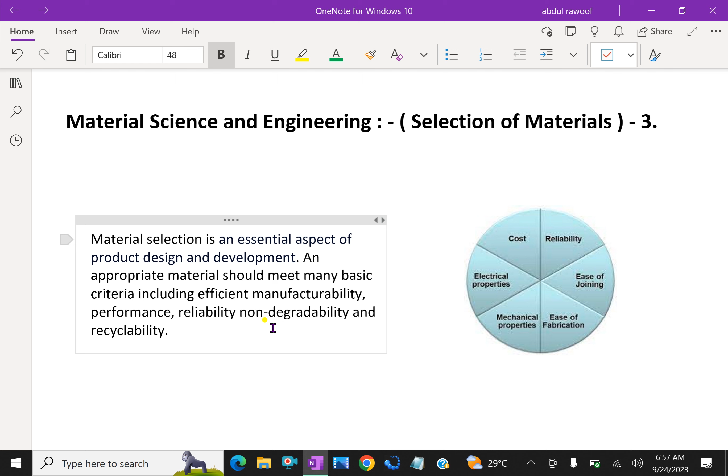In recent years, polymeric materials or plastic have gained considerable popularity as engineering materials. Though inferior to most metallic materials in strength and temperature resistance, these are being used not only in corrosive environment but also in places where minimum wear is required. For example, small gear wheels originally produced from hardened steels, but nowadays nylon gears are also in use.

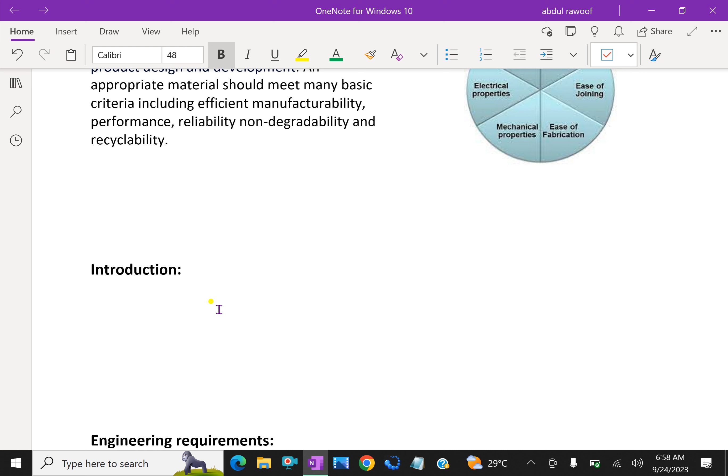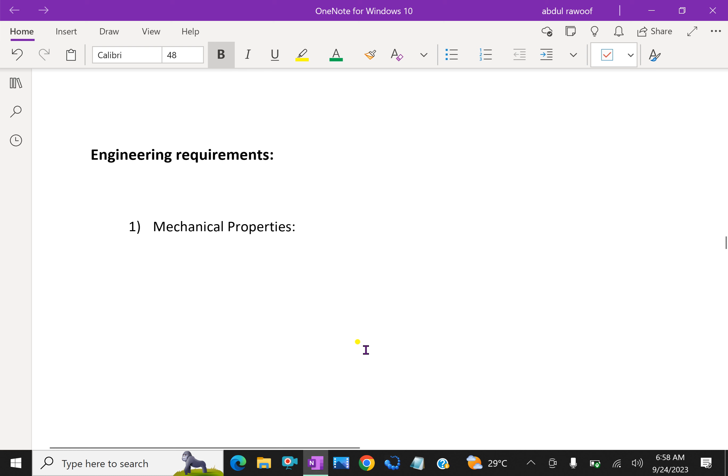Now we'll consider the next engineering requirements: first, mechanical properties. The important mechanical properties affecting the selection of materials are tensile strength. This enables the materials to resist the application of tensile force. To withstand the tensile force, the internal structure of the material provides the internal resistance.

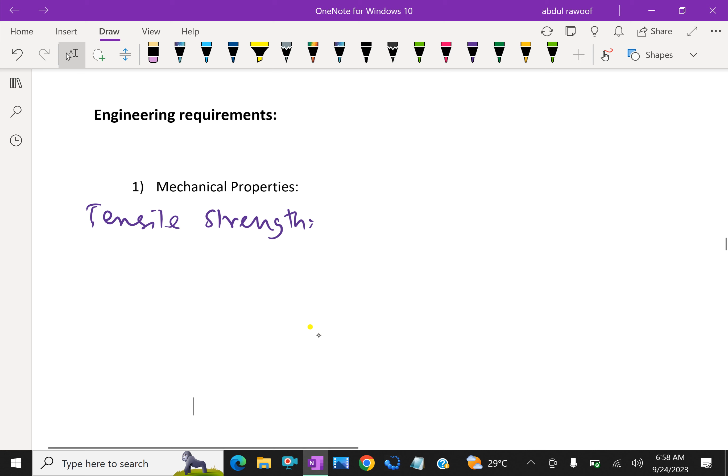Hardness is the degree of resistance to indentation or scratching, that means abrasion and wear. Alloying techniques and heat treatment help to achieve the same. That means the hardness is improved by alloying as well as heat treatment of the metal.

Ductility. This is a property of a metal by virtue of which it can be drawn into wires or elongated before rupture takes place. It depends upon the grain size of the metal crystals.

Next, impact strength. Impact strength is the energy required per unit cross-sectional area to fracture a specimen. That means how much load you have to apply by impact force to fracture the specimen. It is a measure of the response of material to shock loading.

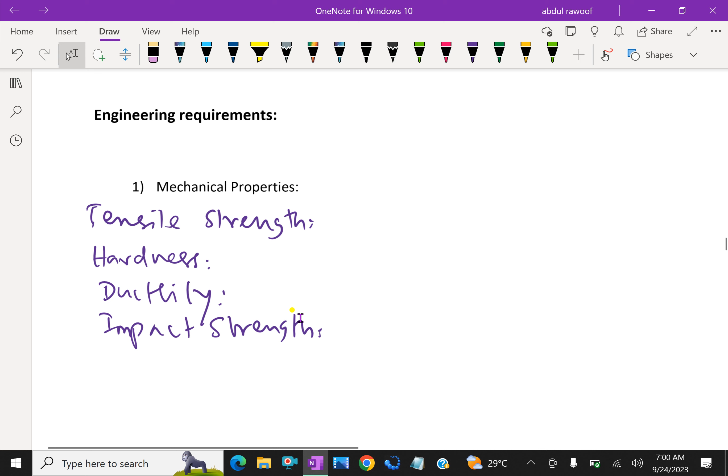Wear resistance is the ability of a material to resist friction wear under particular conditions, that is to maintain its physical dimensions when sliding or in rolling contact with a second member. That means wear resistance is about contact and rubbing with other materials, and how the material resists wear.

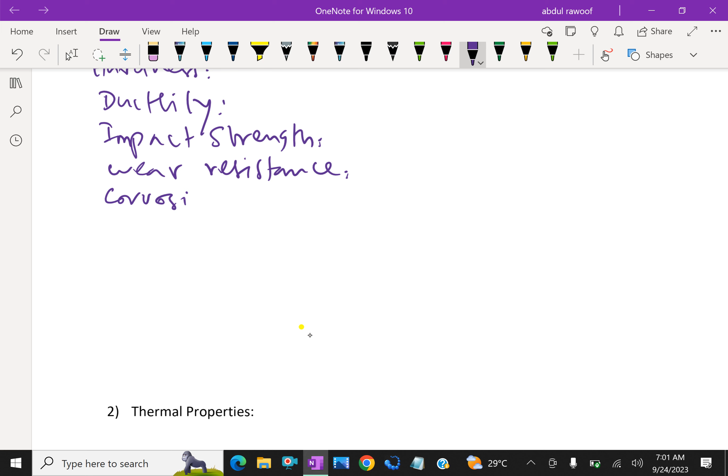Corrosion resistance: those materials and alloys which can withstand the corrosive action of a medium, that is, corrosion process occurs in them at a relatively low rate, are termed corrosion resistant. Mainly corrosion resistance is considered when the environment demands that usage. Next, density.

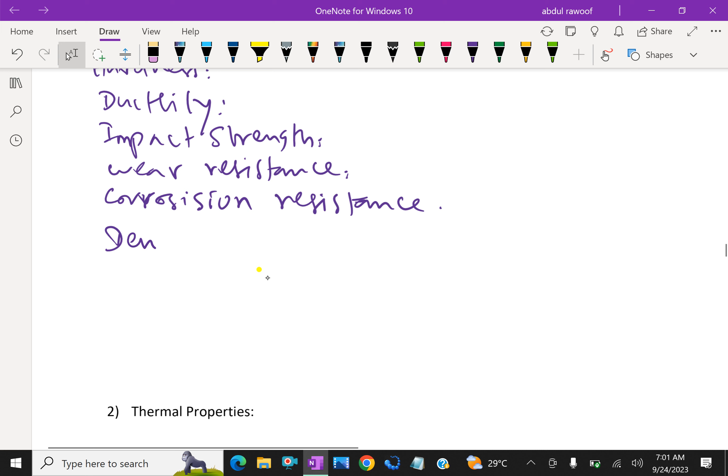Density is an important factor where weight and thus the mass is critical, that is in aircraft components. There, we mainly consider the density of the material. That means less weight, more effect; less weight, more strength.

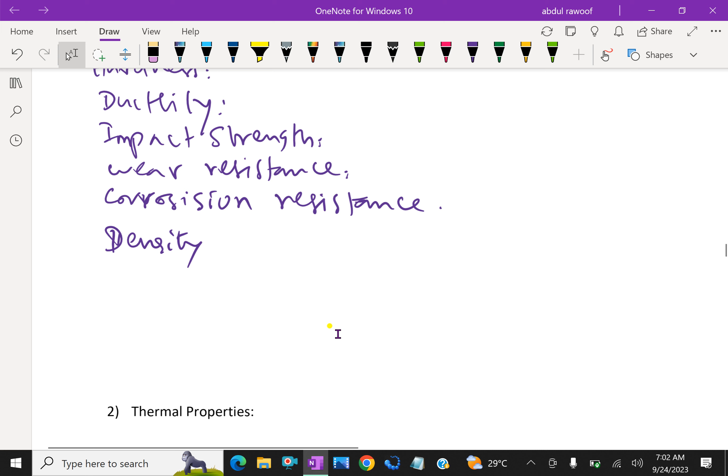Next, we consider thermal properties. The characteristics of a material which are functions of temperature are termed its thermal properties. One can predict the performance of machine components during normal operation if he has knowledge of thermal properties: specific heat, latent heat, thermal conductivity, thermal expansion, thermal stress, thermal fatigue, etc. are a few important thermal properties of materials. These properties play a vital role in selection of materials for engineering applications, that is, when the materials are considered for high temperature service.

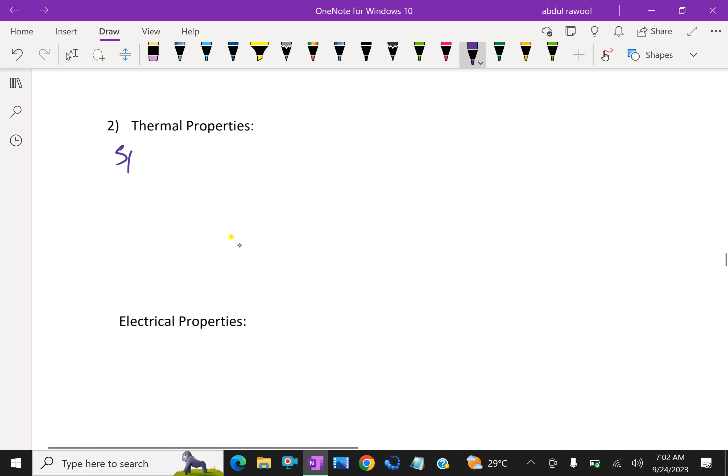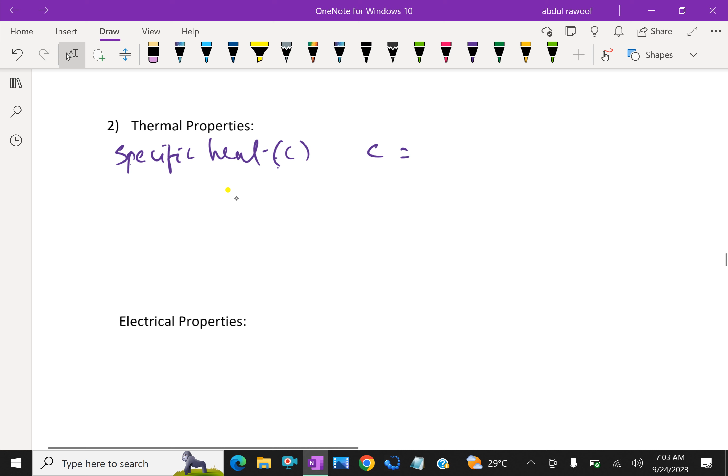Thermal conductivity, K, is defined as the amount of heat conducted per unit time through unit area perpendicular to the direction of heat conduction, when the temperature gradient across the heat conducting element is 1 unit. That means K equals Qx over A(theta2 minus theta1), which is in units of watts per meter per Kelvin.

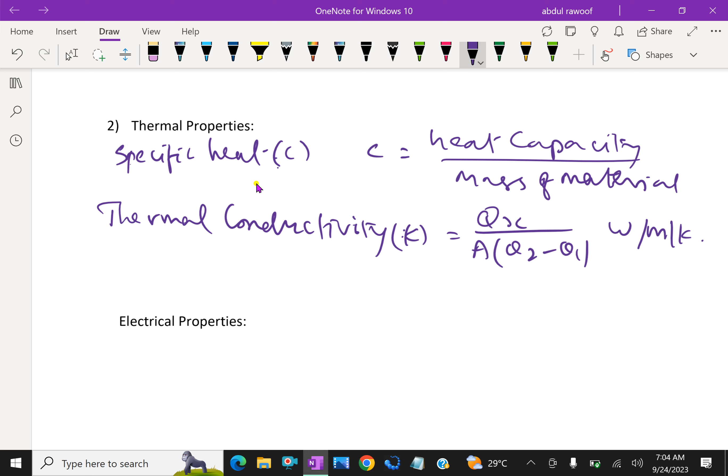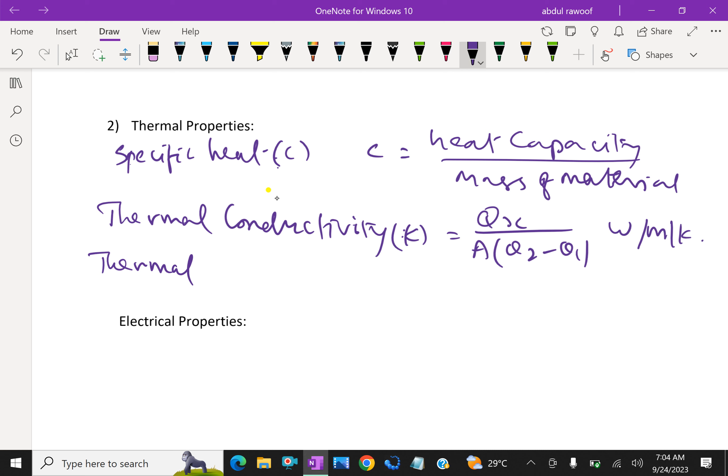Next, thermal expansion. All solids expand on heating and contract on cooling. Thermal expansions may take place either as linear, superficial, or cubical. A solid which expands equally in three mutually orthogonal directions is termed thermally isotropic.

The increase in any linear dimension of a solid, that is length, width, or height, on heating is termed linear expansion. The coefficient of linear expansion is the increase of length per unit length per degree rise in temperature. The increase in volume of a solid on heating is called cubical expansion.

The thermal expansion of solids has its origin in lattice vibration, and lattice vibration increases with the rise in temperature. Therefore, thermal expansion: L alpha T, where L is the original length of the body, alpha is the coefficient of thermal expansion, and T is the temperature change.

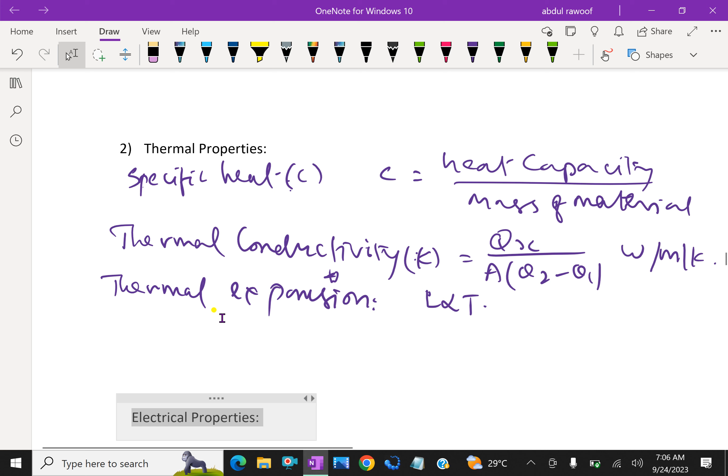Next, thermal diffusivity. It is given by thermal conductivity divided by heat capacity into density. Thermal diffusivity equals thermal conductivity K over heat capacity Cp into density rho.

The material having a high heat requirement per unit volume possesses a low thermal diffusivity, because more heat must be added to or removed from the material for affecting the temperature change.

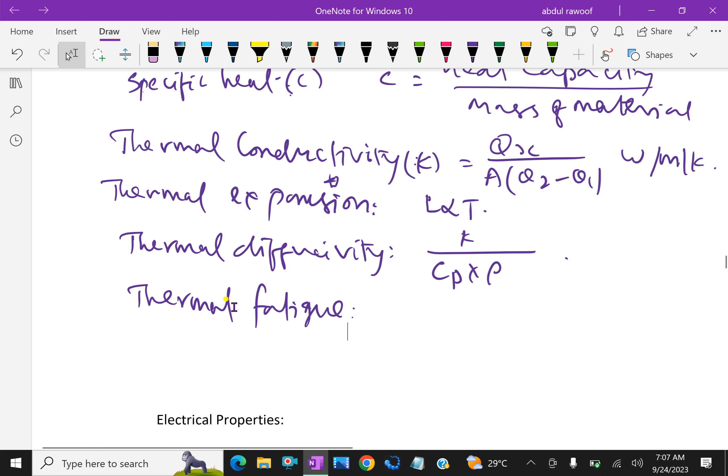Next, thermal fatigue. What is thermal fatigue? Thermal fatigue is the mechanical effect of repeated thermal stresses caused by repeated heating or cooling. The thermal stress can be very large, involving considerable plastic flow. Fatigue failure can occur after relatively few cycles. The effect of the high part of the temperature cycle on the strength of the material plays an important factor in reducing its life under thermal fatigue.

Now next we'll discuss electrical properties. Conductivity, resistivity, and dielectric strength are few important electrical properties of material. A material which offers little resistance to the passage of an electric current is said to be a good conductor of electricity.

Now we can write resistance equals resistivity into length over cross-sectional area. That is, resistance equals resistivity into length over cross area.

Usually, the resistivity of a material is quoted; the unit of resistivity is ohm meter.

On the basis of electrical resistivity, materials are divided into conductors, which are good conductors of electricity; semiconductors, whose conduction varies; and insulators, which do not conduct electricity easily.

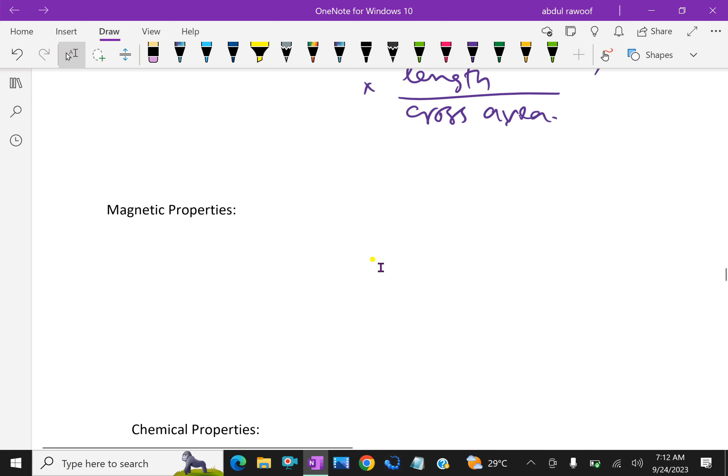So far we discussed material selection in the engineering field. We have completed this topic.